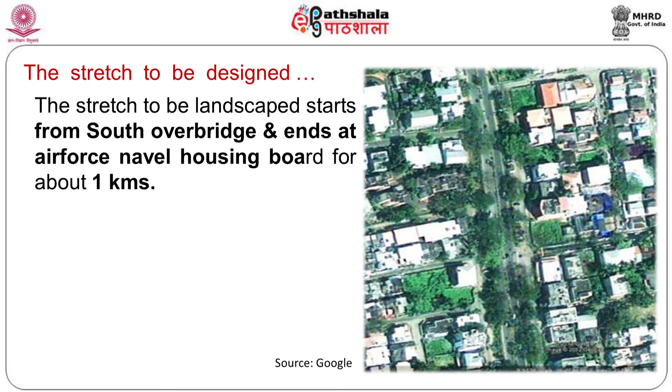Ranges of activities happen in the street. Since the street is burgeoning, it comprises a wide variety of activities happening day and night. During the day, the stretch is quite inactive, slackening without much activity, because all the people go to the office. It's commercial office spaces, so people work inside the office, not coming out. During the night, the street is brimming with life, with a wide range of activity from recreation, eat outs and performance. So how do you react for the street?

Activities that happen in Panampilly street: daytime parking, roadside stalls, some seating. At night, roadside stalls, seating, some performance can take place, small birthday parties, or somebody can give a small Kathakali or some local heritage. Then people can walk around, recreation, people can go skating, and there are a lot of eateries.

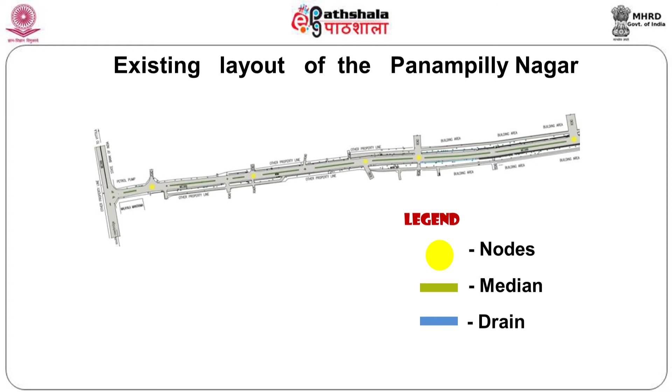The existing layout of Panampilly: we are given the nodes. These are all the intersection points where the vehicle will take left or right. Next, a central median is available. Then you have a drain for water drainage. These are some of the existing features of the road presently: open drainage, hoardings, unorganized electrical lines, trees standing just next to the drain. But how are you going to react and design to make it one of the best streets in India?

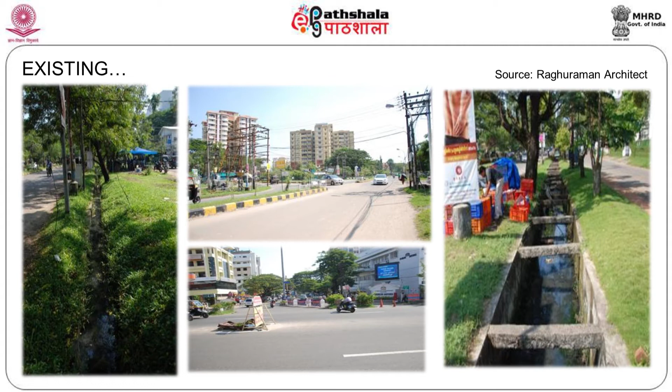That is where we stand. The street lacks a footpath. There is no footpath, only mud. A pedestrian pathway needs to be created, and spaces defined for the shops. Shops are located randomly. These shops have also become the life of the street. You cannot say the shops should not be there and throw them away. Most of our milk vending happens on the streets, so we have to provide them a proper place for their activity in the early morning or afternoon when the milk van comes and they distribute the milk to different places. These are all activities we need to take care of.

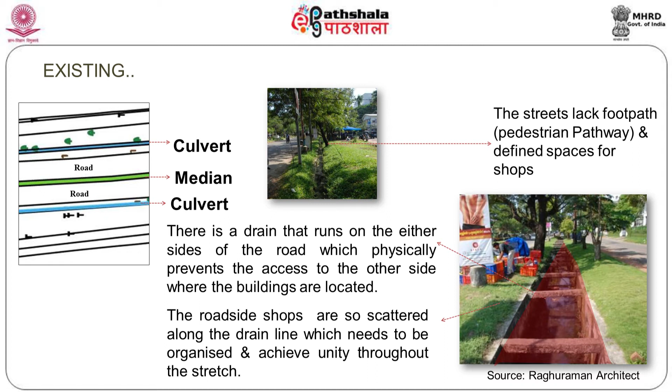Then you have pottery, selling mud pots for plants. You have urlis to sell. All these things are happening. The existing roundabout has to be redesigned with a uniform character. There you don't have a proper planting plan. There is no color or anything. Everything is haphazard; whatever people say at that moment, they design and put it, and then forget about it. Now, as an approach towards urban design, what needs to be done is more important in this context.

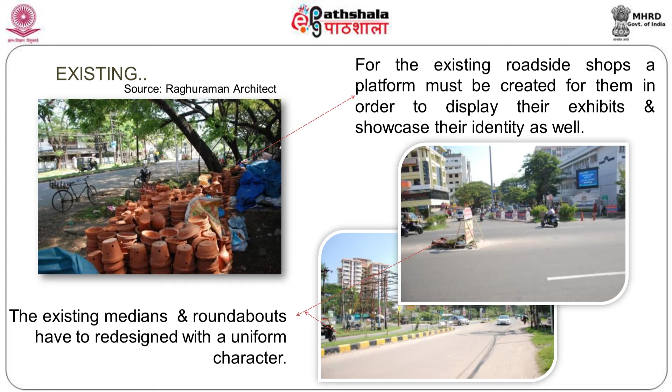So the design features of Panampilly: what design needs to be done? Tree courts. You have to plant trees at proper spacing, normally 5 or 6 meters depending on the size of the tree. Paving material is also very important in streetscaping. Median bollards, so people don't just cross the road and cause accidents. Shops, seating, galleries, so people can sit in the evening and watch people walking around, and old people can sit in the galleries and chat. A small stage can be created for performances. Node points, some mounds and undulating lawns can be created. These are the main features of the roadscaping.

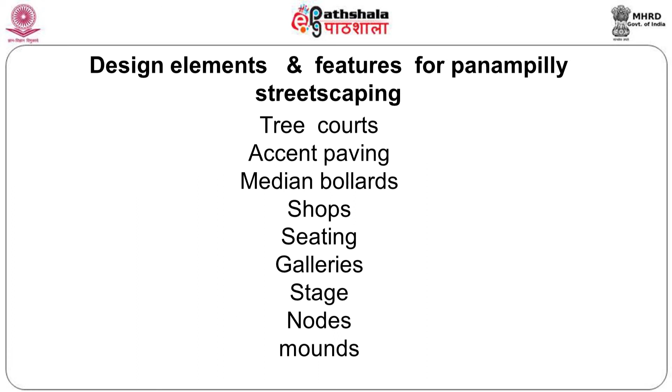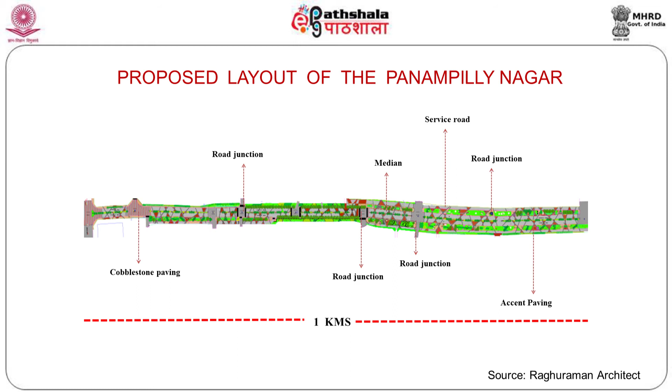Proposed layout. This is a layout plan where you find a lot of red triangles, scissor crossings and road junctions. In the next plan you will understand a different paving pattern evolved on the road. You have black topping, and in between you create scissor crossings like light beams running around, with the central median having nice royal palms and good greenery, and by this means the traffic is controlled. When a junction is coming up, you change the paving pattern. The most important is the driver, how he drives. When the road pattern changes, he knows there is some change and how to react to it.

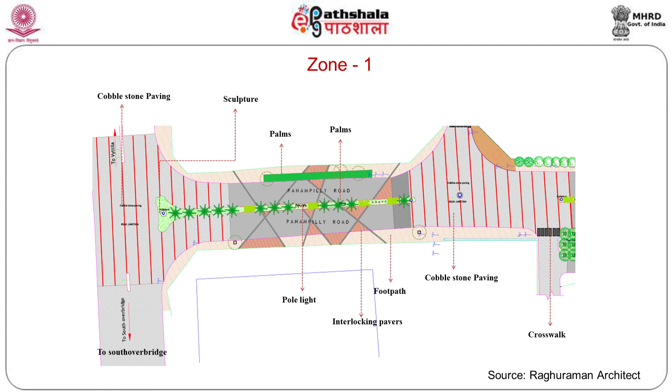See, the pole light is given, flamed granite is given in between the road, accent paving is given, trees are planted along the border, palm trees are in the median, footpaths are provided, and there is open space to make the road look much bigger. We have meadows and lawns. See, cobblestone paving in between acts as a footpath crossing. All these things are there with good lighting. All these things have been taken care of.

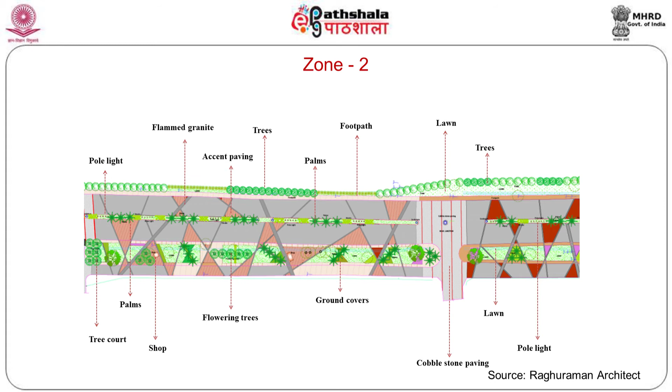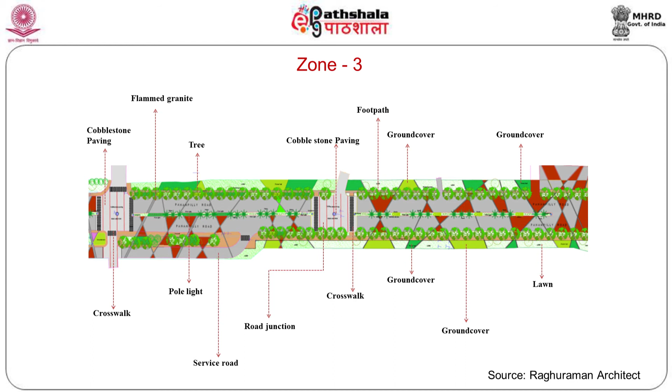This is again zone 1, 2, 3. We have divided the zone so that when you read the drawing, you will understand what is really happening. Space provided for the crosswalk, space provided for the pedestrian crosswalk. Basically, nowadays we are doing a tabletop walkway so that you need not step down or climb up in order to have a walkway.

Junctions are identified properly. Sculpture courts are created so that you have a lot of sculptures and other things, so that the road will have a lot of vibration apart from just tree planting. A lot of vibration in terms of different types of plants, different types of planting, and different types of urban scaping.

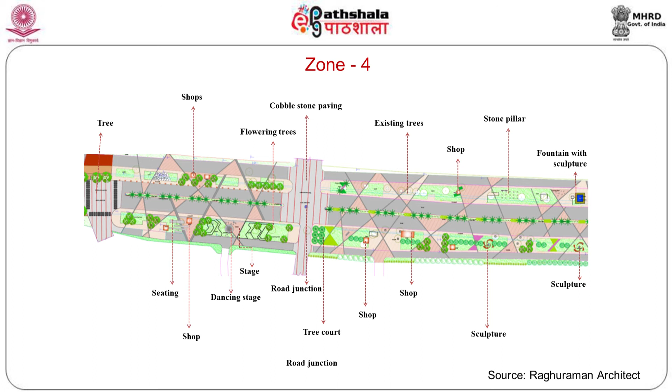For example, an amphitheater, pergolas are created, some rain shelters are created, seatings are provided. So a lot of activity and a lot of things to happen, with the service road also available on this road, being one of the major roads in Cochin. You have ample scope for developing this particular road.

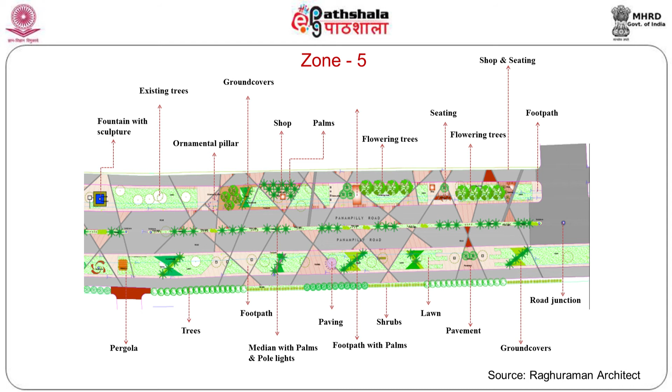You go to Cairns in Australia, where people really think in terms of central greenery, large greenery, with a footpath in the center. Traffic will go on both sides of the road. So you have a large greenery in the center. So there are different outlooks to different landscaping.

Of course, other foreign countries don't have a population like India, so we have to restrict ourselves to the present situation. But these roads can have no vehicular traffic during the night time. These are all the control measures we have to bring in.

So you can see the changes in the flooring. You have a blacktop, you have a cobblestone, you have a different granite stone, bollards are there, tree pits are there with seating arrangement, shops are available, different types of shops are available, and children and different age groups can enjoy the space like anything. We also have to think in terms of going a step further to provide the facilities for the people so that people will definitely use them.

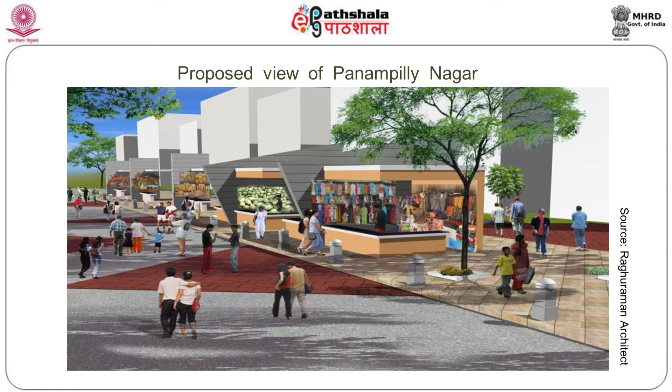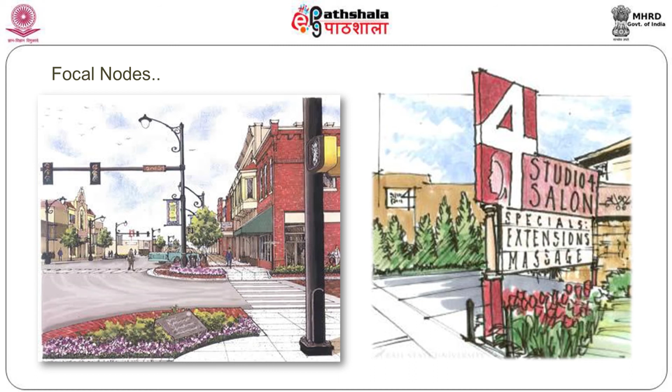These are some of the heritage signages, which are very important in the roadscaping. So these are some of the focal nodes that need to be provided. And lighting during festivals like Onam or Christmas or New Year, Vishu. You have a lot of shopping activities possible in this area. You have to create the spaces for them.

Then your street furniture, bus shelter, seating, shaded seating, gesture seating, all these elements will add to the character of the road. These are some of the things for the differently abled people to walk, so that they will understand that there is a footpath coming across. They can go ahead with the proper cast-iron light fitting.

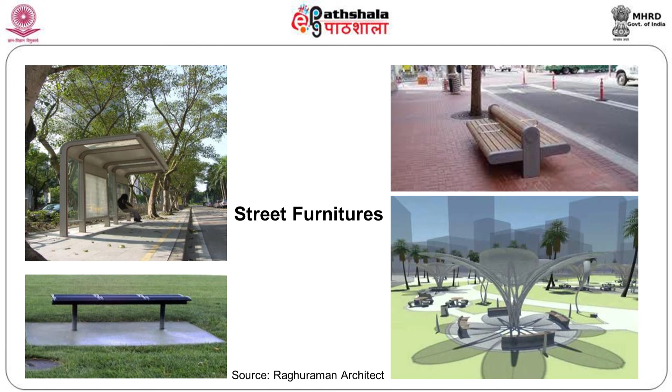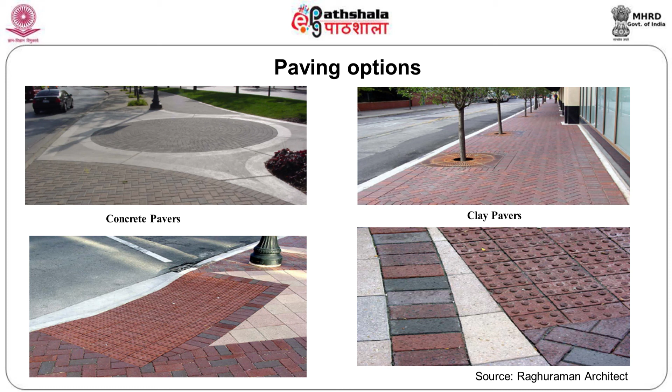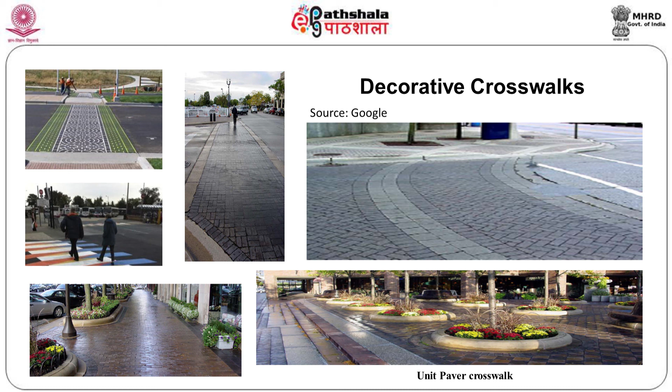Different types of footpaths. You can put the colour as a crosswalk. So these kinds of small details in the road landscaping will add to the character of the road. What is more important is when you add character and vibrancy, the street activity will improve. Like litter bins, what kind of litter bins do you want? Why do you need them? Because we don't want any dirt or waste spaces. You have to segregate between solid waste and compostable waste.

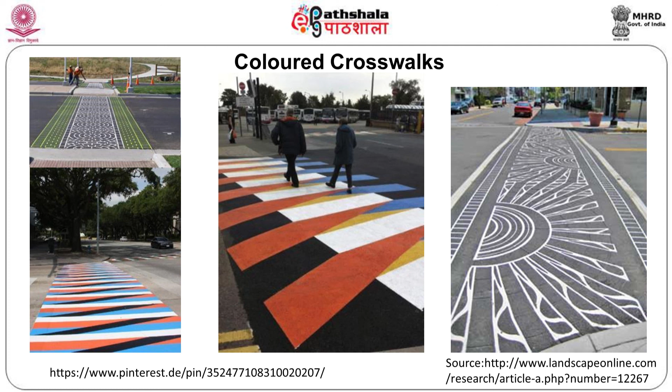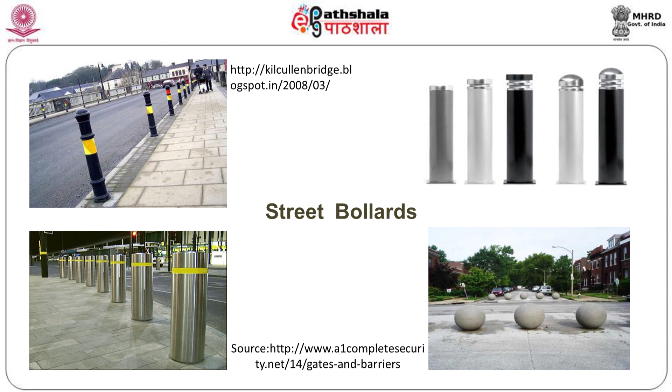These are ideas for the road crossing. Again, ideas for the street bollards. Ideas for advertisement, and then small display stalls, road signages.

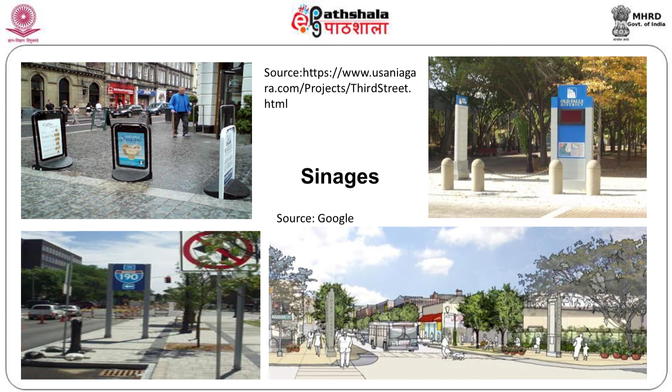That's all. So once this road comes up with the design inputs, whatever we had given, this will become one of the most apt urban roads in India, because the road is used in different time periods and in different ways. Morning till evening it will be used as a commercial road with lots of traffic moving around.

After 7 in the evening, the people will be using it more as a pedestrian walkway with lots of shops available for them, lots of lighting available for them, lots of seating space available for them, and greenery around you with a good lighting facility. All these things will happen only up to 11 p.m. People will set up their shops by 7, close and clean up everything and go by 11. So you have a totally different activity.

As I told earlier, it's going to be a fun and food street. You will have a lot of fun for the people, and different varieties of food are available here. So enjoy this road. Thank you.